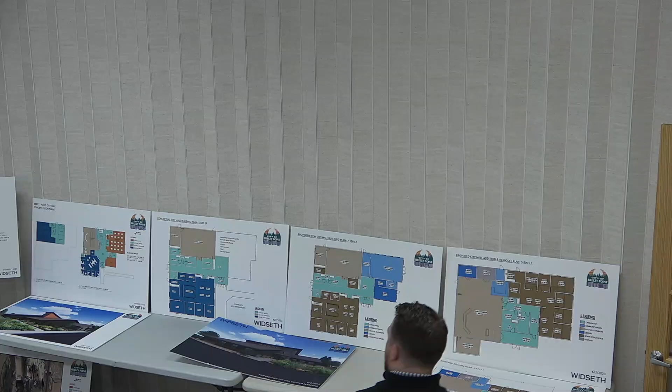So with that, I'm just going to move right on into how we got here. By the way, just so everyone is aware, we are recording tonight, so anyone who isn't able to attend will still be able to watch this presentation later. We'll get the video uploaded tomorrow.

As we talked about before, and I mentioned at our last open house on November 27th, this whole process started back in the summer of 2022 when it was identified that the city didn't have a facilities plan. Myself, Chief Sandell, Public Works Supervisor Zierden, and our building official Scott Sadusky went through a walkthrough of all the buildings to kind of feel out where we were at. We identified some issues with other buildings, more minor, like the public safety building, where we upped the budget for annual building maintenance. But the real concern came to City Hall, with some deferred maintenance issues in this building, as well as our spatial constraints.

So we brought it before the City Council last summer, and they said let's move forward with getting a facilities assessment completed. That was included in the summer of 2022 -- we're in 2024 now, so that was summer of 2022. Then included in the 2023 budget was to go down this facility assessment process.

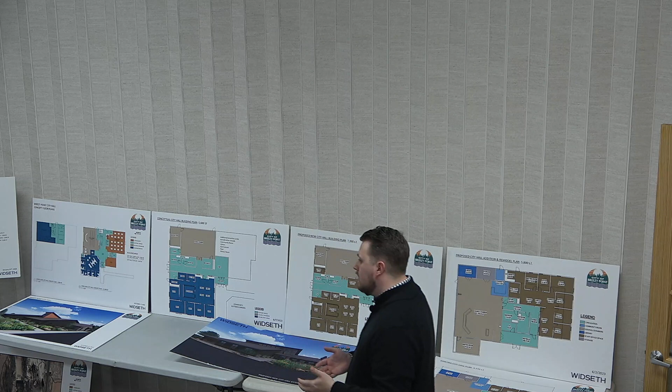We kicked that off in January. I believe Lindsay was here at the January 2023 council meeting to talk through what that process was going to look like. Then in May of 2023, on May 16th, we held a workshop, and Widseth presented their findings of the facility assessment. All that documentation is on the city's website under the city projects page, and also in my memo in the packet, at the very end, there are links to every document on that page.

So they identified roughly about $750,000 estimate of deficiencies to this building. But acknowledging that we have some spatial constraints and concerns long term, one of the pieces of that facility assessment was to look at what are some expansion options.

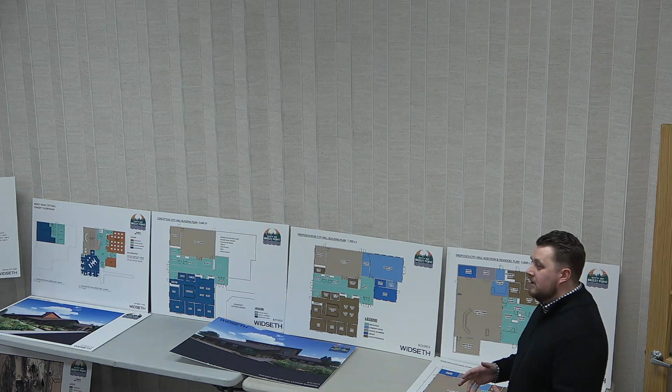This is actually not that new. During my perusing as we were going through this process, I found that in 2008 the city even issued an RFP to have this very discussion and have someone come in and do a facility assessment on the building. At that point the city council didn't move forward -- I'm not exactly sure why, but I think it had to do with the recession. So at that point they didn't move forward. But in 2008, it was already kind of identified that this building might not be adequate long term.

So there was a couple different options presented to the council in May. Obviously there was just the fix-what-needs-to-be-done option.

Option 2 was to fix what needs to be fixed, as well as expand the building, do about a 1,400 square foot expansion to the building and kind of reorganize the entire building. That would essentially require the building be vacated, brought down to the studs, and then completely remodeled.

Options 3 and 4 were iterations of a new building. That's on this board here. Essentially, the difference between 3 and 4 was this section here of the community room and library. Option 3 was just council chambers and staff space. Option 4 is council chambers, staff space, community room, and library.

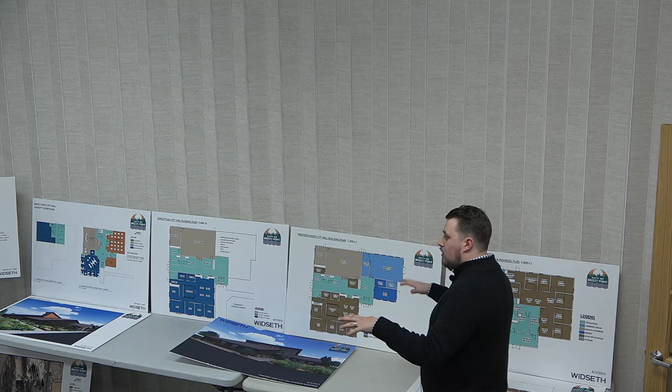Expand on what we do have, we serve here in this city hall, where both the council chambers offers as a council chambers and a community room. Dedicate those spaces, increase the library space. At the May 16 meeting, the council's consensus was option 2. Let's look further at options 2 and 4: the option of remodel and expansion, and the option of a new building with the community room and library.

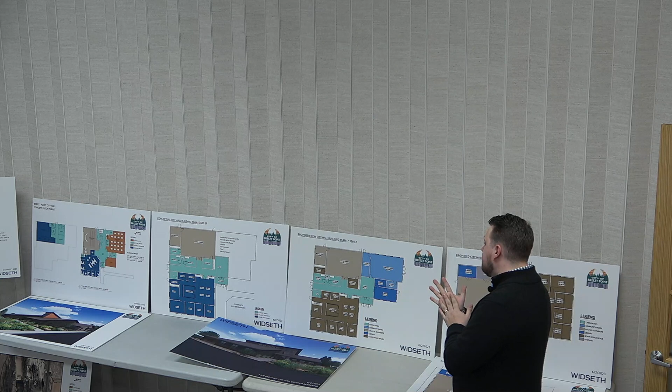So from there, that's when we created the city project page. Shortly thereafter, once the city's new website was launched in June, we held an open house where we had these 3 boards up, as well as this external rendering, and invited people to come in. Myself, Daniel, Assistant Administrator Ike, Mike and Lindsay were here. We talked through this with people that showed up, and we gave full tours of the building.

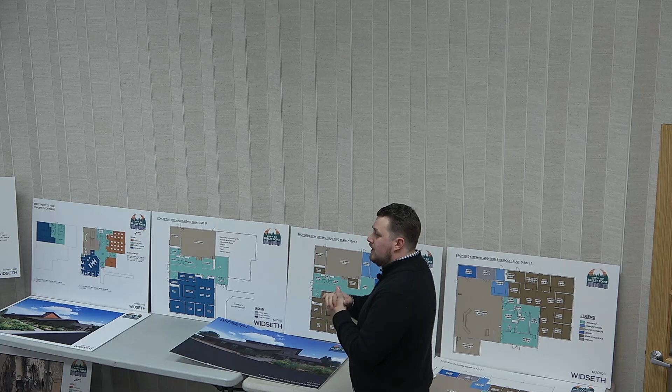Additionally, we brought in Baker Tilly to be one of the city's municipal advisors to give us some financial analysis. What could the city afford? How can different bond ratings work, and what could the city do financially when it came to paying for this potential building, remodel, or expansion? So then on August 1st, we came back and had a discussion of that.

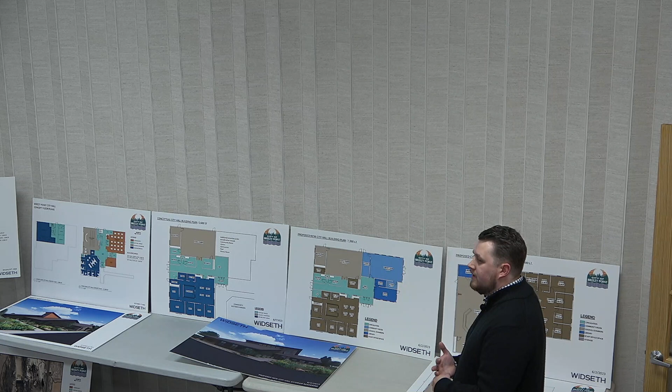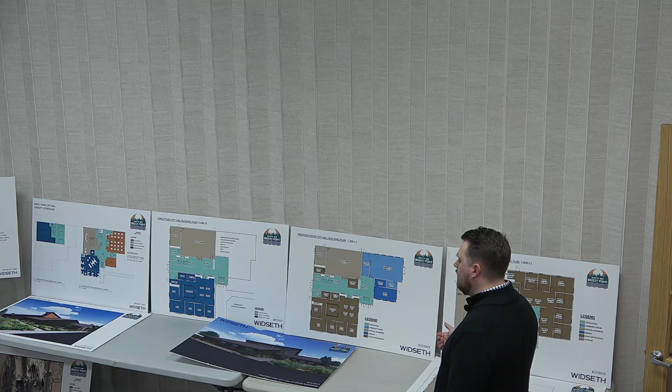Baker Tilly was here, ran you through those financials, ran you through potential bond runs, what those looked like. And then we had further discussion of, okay, here's what we've heard, here's what you've heard, what do you want to do? At that point, the council decided to move forward with furthering a design for a new building.

And then on August 7th, the council meeting approved a contract with Widseth initially to go into schematic design, take this design and go to the next step, with a couple caveats. It was essentially option 3/4, have the community room and the library as essentially add alternates, as well as what would a community center element comprised of a gymnasium, fitness room, pool, walking track look like.

So we went through that process. That did have some user groups involved to talk about what would you use in the library, what would you want to see in a community room, what would you want to see in a community center.

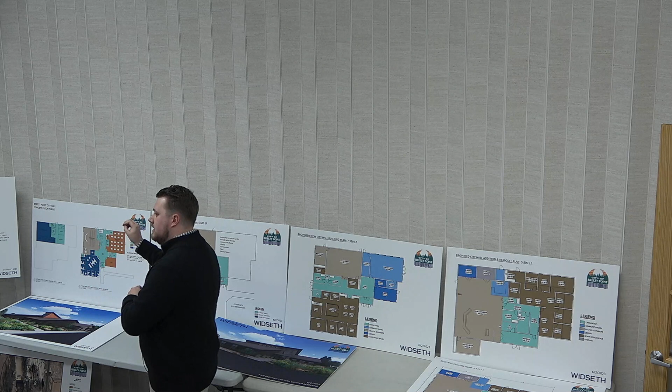So then on October 17th, we came back again in a workshop and presented this initial new design. Widseth kind of went back to the table and based on what we heard, redesigned the building a little bit to better fit the uses. There was a community center element that went to the east here.

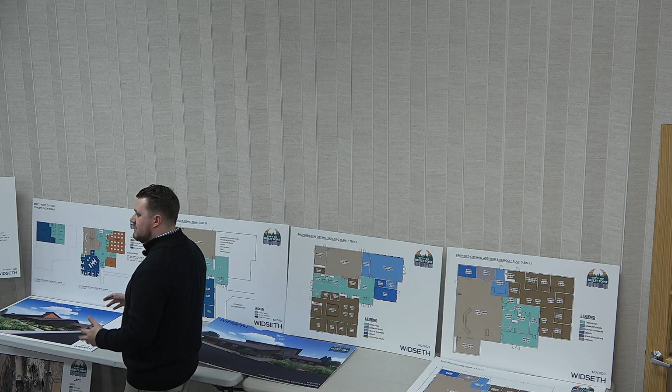So if all of these, the bottom of these boards is County Road 11, just for orientation. That went to the east. At that time, the city council discussed it, liked to see that there was a possibility of that in the future, but decided not to further pursue the community center element.

So that was on October 17th, and then at your November meeting, you went and signed a full design contract with Widseth to move into final and full design of a new city hall building comprised of the community room, library, council chambers, and staff space. So that's what we've been doing. That was approved in November.

Beginning of November, we have the design team that met pretty much weekly to work through every element, talk about what HVAC, mechanical, electrical look like, programming of spaces, making sure we got that all right. On November 27th, we had that second open house where we presented this initial first design. Had about 50 people there, a very, very good meeting. Presented this and fielded a lot of questions for about 75 minutes.

People had questions, concerns about the process, the building, financing, etc. We listened, we took a lot of notes and heard a lot of things from that meeting. Then on December 5th, we gave an update and heard some more feedback from the council about this initial design.

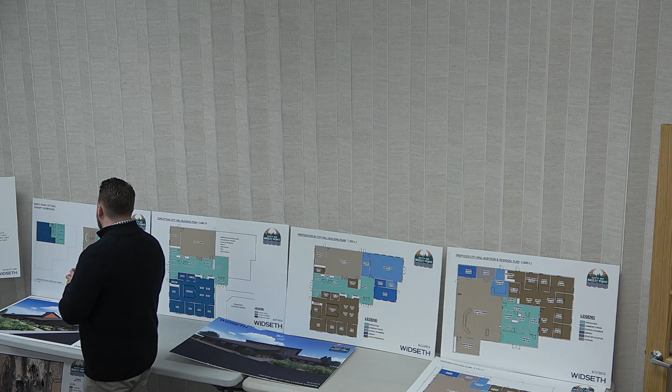This design was a building that was essentially a 2-level building of 11,500 square feet up top and a 4,000 square foot basement. The basement was intended for mechanical systems and was designed to be unfinished for future expansion, taking advantage of the topography on the land, potentially with a walkout. That space could be expanded in the future depending on how city growth goes.

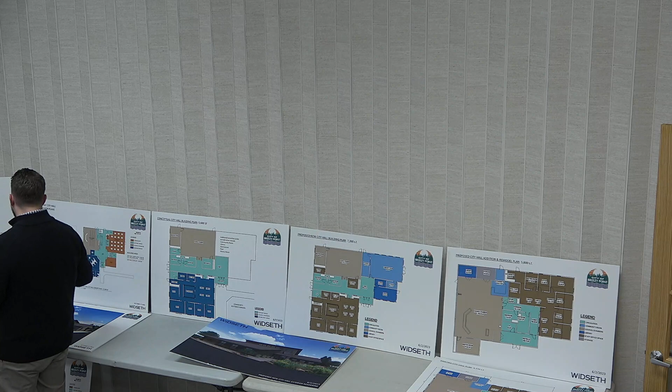So in December, moving into January, we continued to work on it. Shortly after Christmas, Widseth, as well as Andy Picard with High Tech, were able to put together an initial cost estimate for this building. At that time, construction was estimated to be about $4.5 million. That did not include the FF&E, and did not include design costs.

We as a design team said that's higher than we want to go. So we took a step back and asked, what are ways we can cut back? What are the essential functions of this building, and what are things that are additional? That brings us to essentially the design we have that was in the packet and that we have here tonight to talk about, which Lindsay and Mike are going to go through in detail.

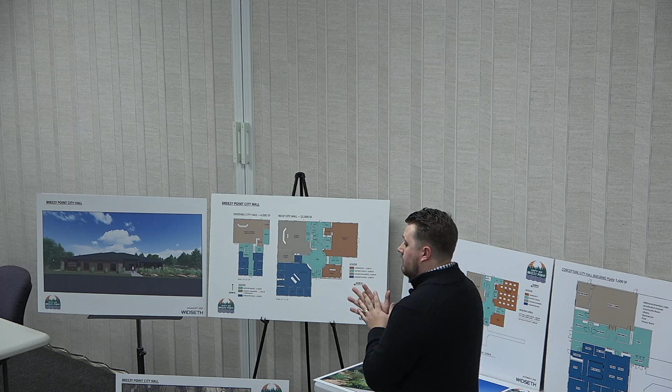But I just want to go over the high-level items that are different. One of the first things is that this is now a 1-story building, so we got rid of the basement. The basement was estimated to be about $750,000. As much of a luxury as that is, it's really a luxury and not necessarily something needed today. Honestly, looking into the future, even 10 or maybe 20 years out, we didn't have an identified time when we might need to finish that basement, because this building is designed, even in its current 1-story configuration, for growth. We'll talk a little bit about that as Mike and Lindsay go through it.

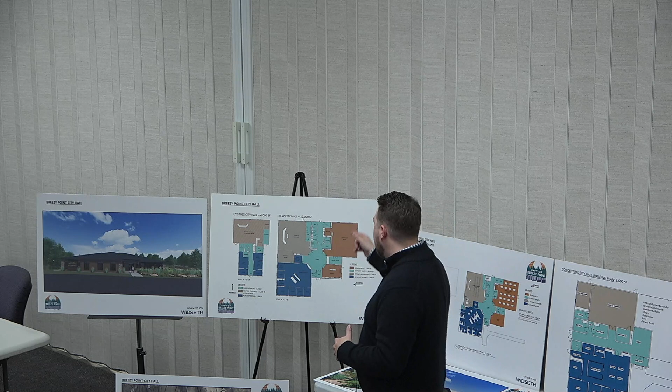So with removing that basement, we saved some cost, which involved rearranging some mechanical and electrical systems. But by doing so, we were able to get rid of a staircase and an elevator shaft as well. Both had a cost, and it also provided space to relocate those mechanical and electrical systems.

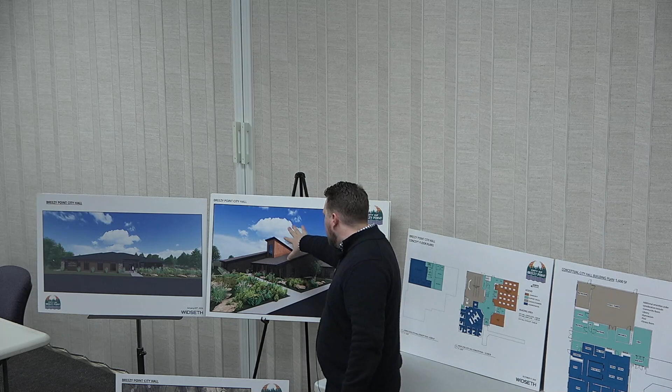The other thing you'll see, if you go between what was presented in November of '23 and what we're presenting today, is that the exterior has changed. We received some comments that the exterior maybe seemed a little extravagant, so we toned it down. We looked at the finishes, took the roof down, got rid of the big glass cap up top, and toned it down overall. It's less in-your-face, a more toned-down building.

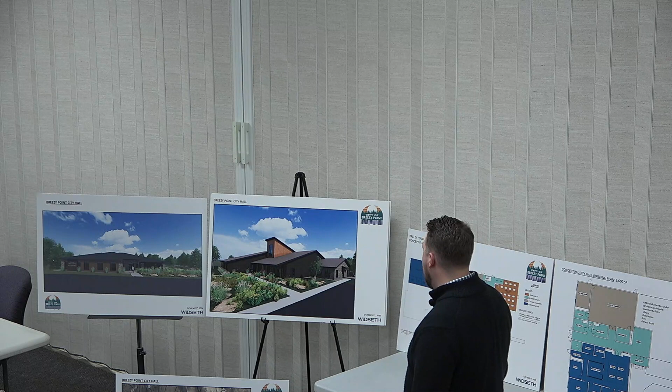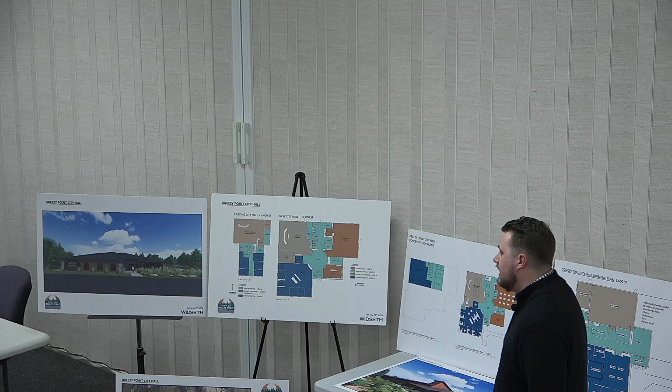We looked at the external finishes and toned those down as well, but maintained the internal floor plan. So that's how we got here. Tonight we're here to go through the details. I'm going to invite Mike and Lindsay up now, and we're going to go through each element of the proposed building in detail.

Thank you, Administrator Chansky. My name is Lindsay Krenz. I'm here tonight with Widseth to walk through the revised floor plans for the proposed new City Hall building. This image shows side by side the existing City Hall and the new City Hall together, at the same scale on the page, with square footages shown. The departments are highlighted similarly, so you can visually see where each of the departments and support spaces fall on this drawing.

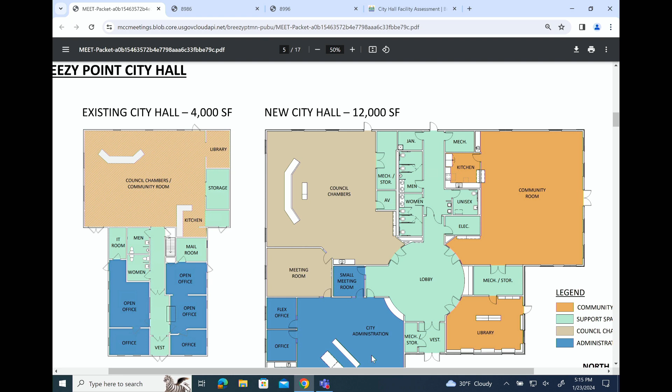The one thing to note is that the room we're actually in right now is a multi-purpose space, shown in overlapping tan and orange color because it acts as both the council chambers and the community room space, so there's a lot of shuffling that happens in this space. The plan for the new City Hall is to have a dedicated council chambers and a dedicated community room with separate access, allowing the council chambers to stay set up formally without that constant interchanging of groups of people, furniture, and AV equipment.

So the highlights—I think David did a really good job of explaining the differences between these buildings.

The changes that we've also developed: again, the one level facility, we still enter in basically the same direction from the west, entering into the centralized lobby space. We have the 4 quadrants of the building. Not much has changed there. City administration in the lower left-hand corner. This space didn't really change much.

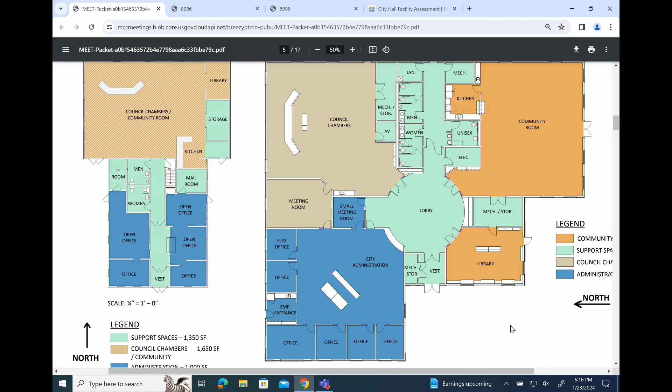We did reconfigure the entry door system. If you want to go to the site plan. Just because of the change in grade, we're no longer having that lower level and the walkout capabilities, so we thought adjusting the employee entrance into that administrative area made some sense, a smaller sidewalk, so they've got

a dedicated entrance and exit to that space. Also, the main public walk area, we felt it was really important to maintain the design of a snow melt system through the entry sidewalk. So the light gray areas, as you can see kind of central on the plan, those would be for a snow melt system. It's a really nice maintenance item, so we prevent a lot of slipping and falling, and a lot of snow and salt materials coming into the building as well.

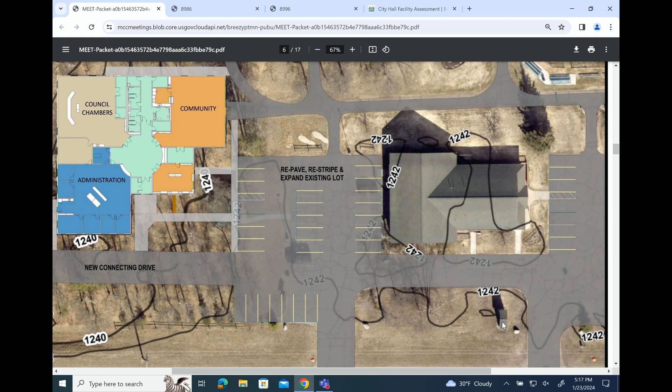So some other changes on the site: the existing monument sign that's right outside of the existing city hall, we deemed that to be really in great condition and no need to move it just slightly north on the site. So that would remain in its existing location.

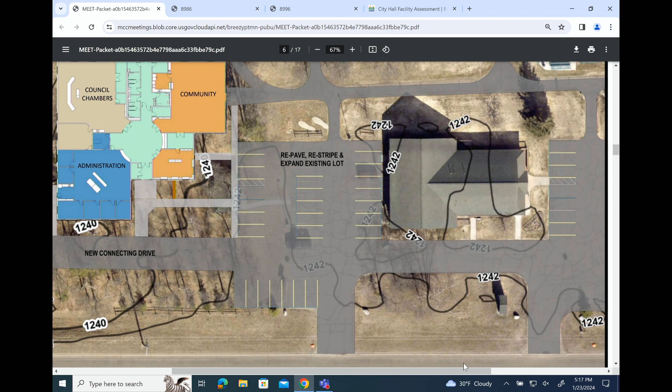We are planning to repave and restripe and expand the existing parking lot that's just north of this building to accommodate additional parking spaces, and then the new connecting drive to the public health or the public service building to the north here. We did, however, take out the patio.

So outside of the library, we had proposed a patio space, which would be accessible either from the exterior or the interior of the building. The benefit of that is it's a really easy thing to come back and add at a future time, so if there's a desire to have that amenity, it can be added in. We have an exterior door out of the library, so it's still really accessible.

As we look at the community room, this space is still providing access from the exterior. So when we think about large groups, catering events, community events, voting, that area is going to be really accessible from both the interior of the building and the exterior with a dedicated entrance.

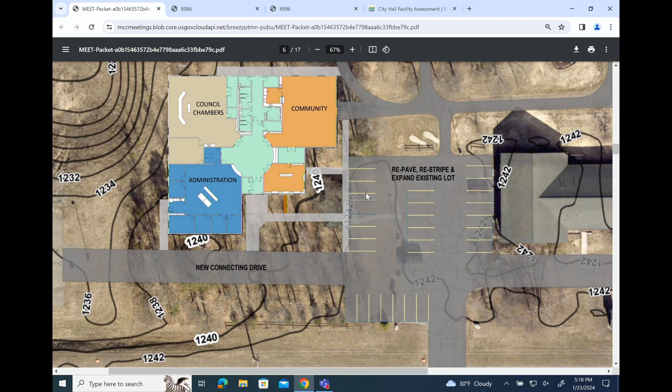And then to the east of the plan, we've got an egress route, so from the council chambers, the circulation area, we've got a really nice egress route as well as exiting the building, we added a feature. At the last open house, we heard about making this facility a lot more accommodating to public members that might be using the park or the trail system.

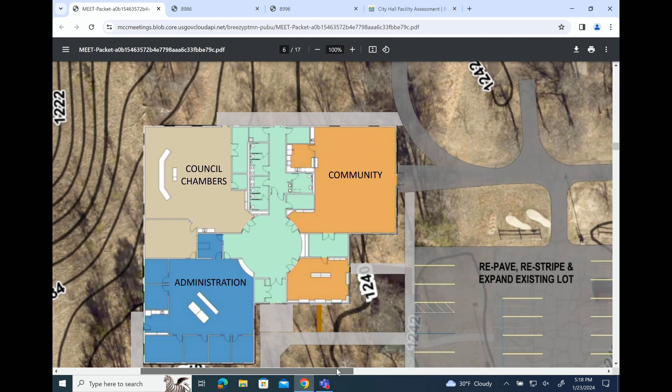So from that egress sidewalk on the east side of the building, we can actually enter in that door and have access to the men's and women's public restrooms as well as the drinking fountains. David's hovering over a set of secure doors that we included in that hallway. During normal business hours, those doors could be propped open, and then in the evenings, those could be closed and locked, so people could have access through that east-facing door to those amenities, which I think is a really nice feature.

During our user group meetings, we met with Joe Zierden, and he mentioned how he would prefer to have an accessible restroom for people to use at the park all hours or all seasons. So I think that was a really nice development based on the feedback we received.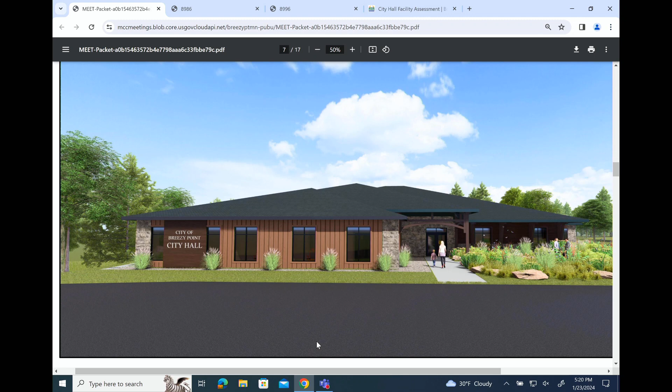We took a look at several different types of roof structures, also different roof materials, so shingle roofs versus metal roofs. Everything has a budget and a maintenance impact, so it's about this balancing act and finding where the best balance is going to be. So this is where the exterior ended up today.

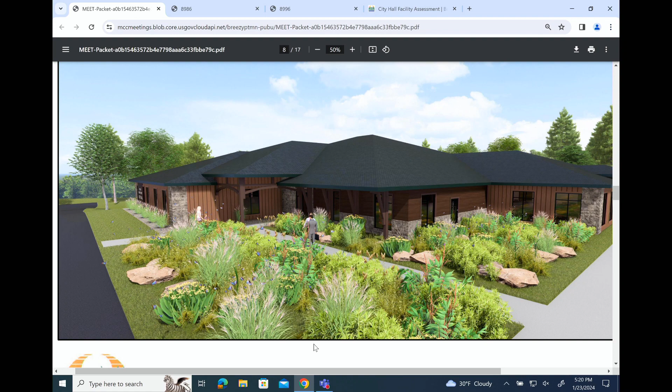Still different materials, really bringing in that northern Minnesota feel. That was one thing we also heard at the last open house, was really wanting to make this feel like we're in northern Minnesota intentionally.

Another really great feature is we've talked with the gardening club, and they love the opportunity to bring the beautiful botanical gardens from the cemetery over to City Hall. Through landscaping efforts, we'll be able to bring and incorporate those garden elements at City Hall too, and I think they've even offered to help maintain and manage that planting area. So really a beautiful entry into the new building.

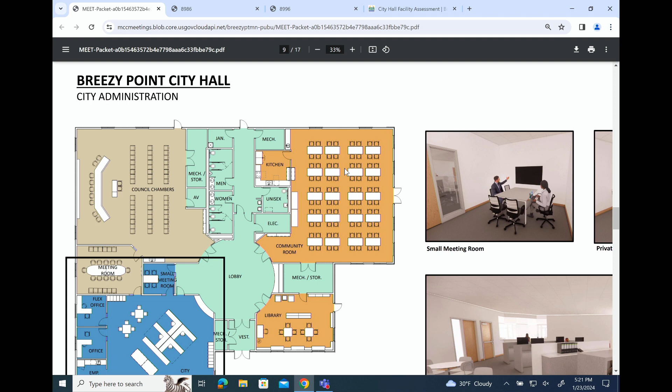So the next few slides here highlight different areas throughout the building, and they're paired with interior renderings. The interior renderings show furniture and people as a sense of scale. This is still really flexible. We haven't really figured out a furniture package, but I think it just helps illustrate the use of those spaces. Material-wise, we keep things very neutral at this point. We haven't selected specific materials, but it helps illustrate the use and scale of a space.

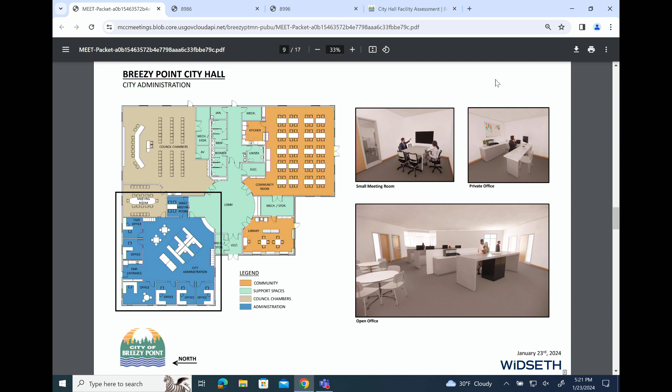So the first area we're highlighting here is the city administrative offices. We have the large rendering in the lower right-hand corner. This is the open office area. One comment we did hear is that the configuration of the cubicle furniture looked a little limiting in this configuration.

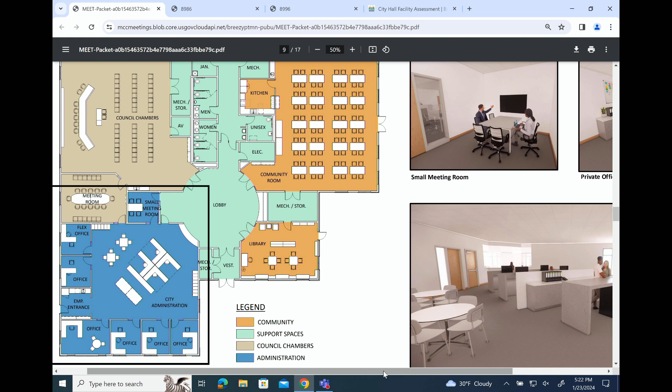In today's environment, we only have the need for 4 cubicles. But we did take a look, and we'll see as we slide through some additional images, how that space could be reconfigured to accommodate future growth without ever changing that space architecturally, which I think is really interesting to look at, how the furniture can support that. With the removal of the basement, we also talked about the benefit of bringing the power and data to those cubicle stations overhead, which will really promote future flexibility as well.

So you can see in this rendering we're also showing filing cabinets and storage. Without the basement, we would need to accommodate storage on the main level, so we're showing a really good quantity of filing cabinets and storage capacity there. We still have the dedicated employee entrance with a little kitchenette space, so the administrative staff can just stay within their office. We're showing collaborative tables and/or lunch tables in here, and also included the flex office, so that is an opportunity for growth.

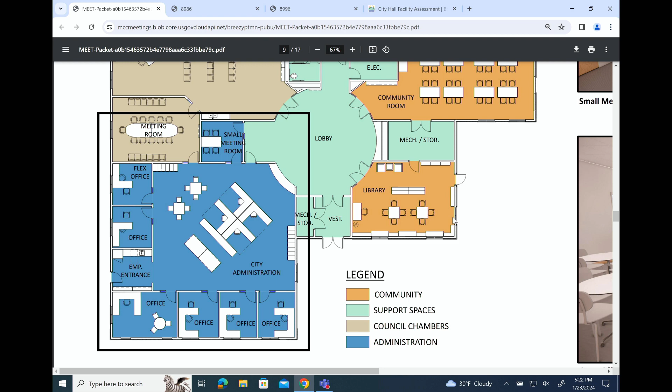As we look at the renderings on the right-hand side of the page, a little bit more detail. So again, this is the rendering of the large open office space, the private office, and then we have a small meeting room. So this is a really unique attribute this plan has for safety and security.

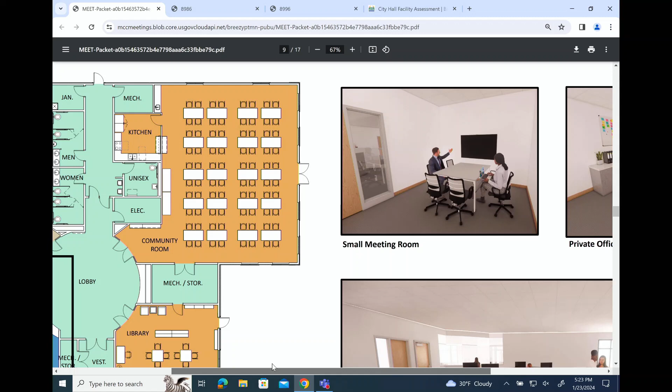Instead of inviting public members into your private office, where those conversations might get heated or contentious, we now have a small meeting room that the public can enter and the city staff can enter from a different room. Through door security hardware, the administrative staff could pass back into the administrative office and the public has free access to the lobby. So a really nice common small meeting space for some of those conversations that would previously have happened in the hallway or in someone's private office, for example.

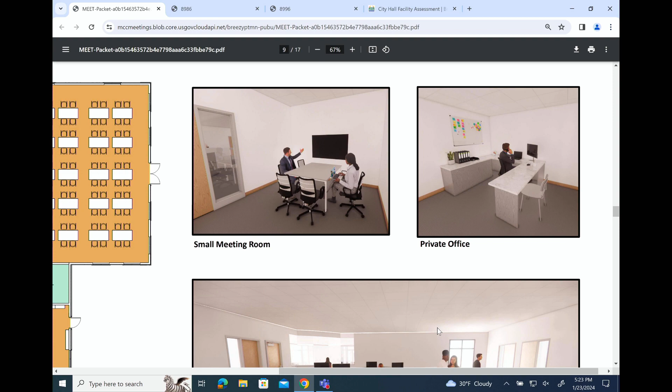All right, so rolling into the next slide, we'll take a look at the council chambers, but I just want to remind you to look at the overall floor plan. If we look back at the city administrative offices, we've shown a wider range of furniture arrangements here to accommodate, again, that future growth and flexibility within the space without having to change any walls or ceilings.

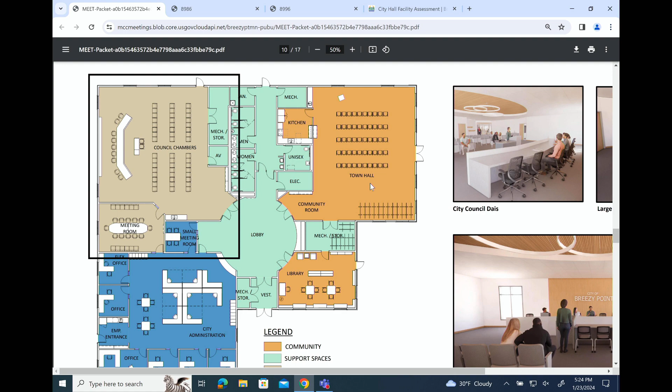Council chambers, as well as the community room. The community room, as you see, is in a town hall setup in this slide, and will continue to change from image to image. The previous image was more of just a traditional community room with tables and chairs. This was something we heard through the user group intake sessions, that the room was a little bit smaller in scale than we probably needed, so they wanted a room to comfortably plan for 75 to 100 people. That has been accommodated with this plan as well.

The council chambers room has dedicated seating, not attached to the floor, but probably will remain in the configuration that it is. We have the dais at the front of the room with a podium similar to what I'm at right now, so a standing height podium opportunity, but then also a sitting table. Sometimes those presentations like to have options for multiple configurations.

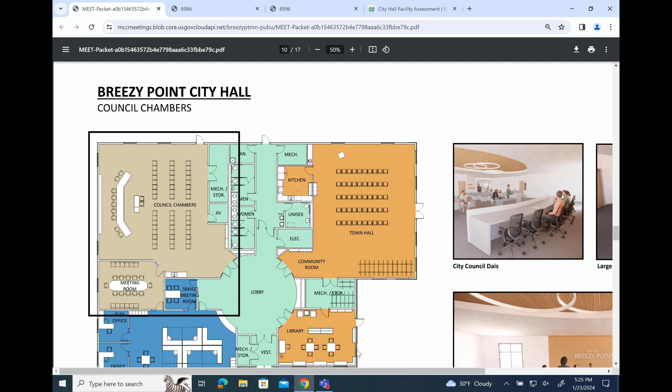Adjacent to the council chambers, we have a large meeting room to accommodate up to 12 at the meeting table, plus an additional 12 people in that meeting room as well. So if there's a need for breakout sessions or just a smaller, medium-sized meeting space, that room has been illustrated there. These spaces would be heavy on an AV package, but there's been a lot of conversation that the AV package currently in this room would accommodate the needs of that space very well. Hoping to reuse a lot of the existing equipment, the TV screens, those types of things in that space.

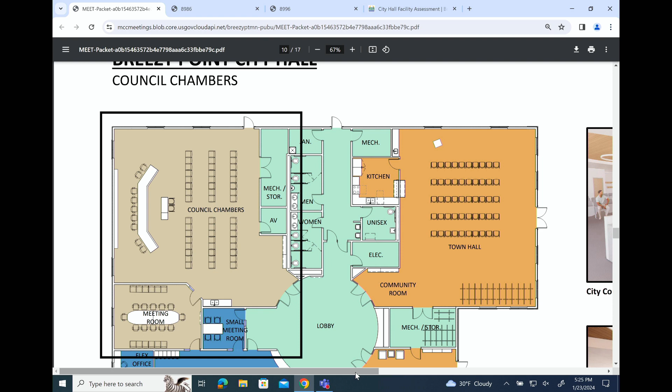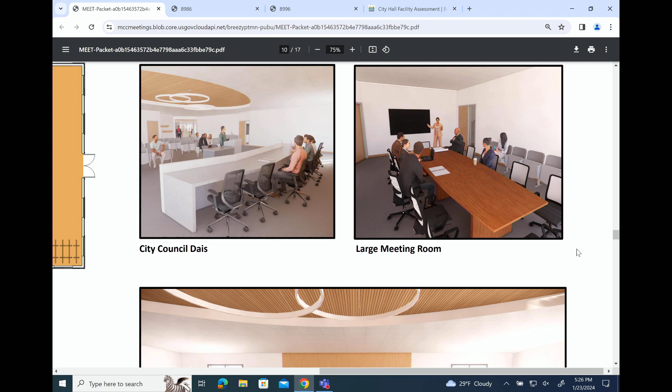If we pan over to the renderings, this room is shown from a few different angles. We have a view from the council dais desk looking out into the audience space, a view of the large meeting room and the technology provided there, and a view from the audience looking at the dais with the presentation table, some nice signage on the wall, and acoustic ceiling treatments. The acoustic needs of these spaces with an AV package is a little bit higher than your traditional room, so that's accounted for as well.

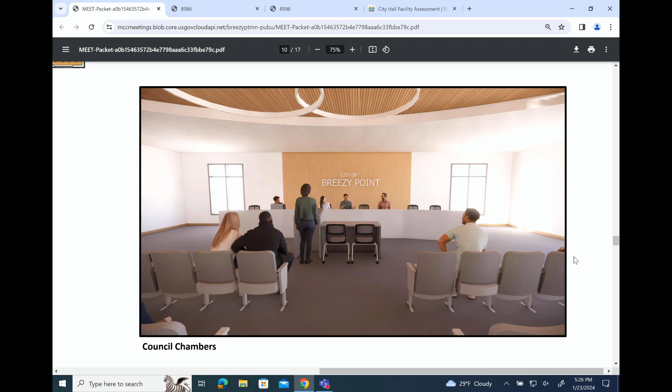Rolling into the next slide, we take a look at the community room. This is kind of a split concept - I think of this as being more of a training room. We have the traditional tables and chairs at the back of the room, with more of the town hall facing east, lines of chairs on the other half of the room. This room would be accompanied with an AV screen and a technology cabinet, so presenters could have access to that technology if needed, but not necessarily available for everyone to use at all times.

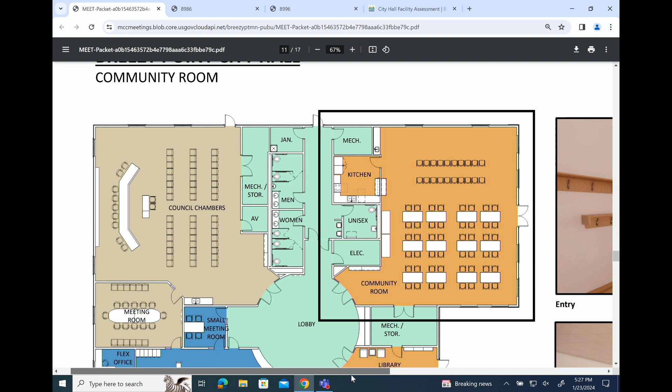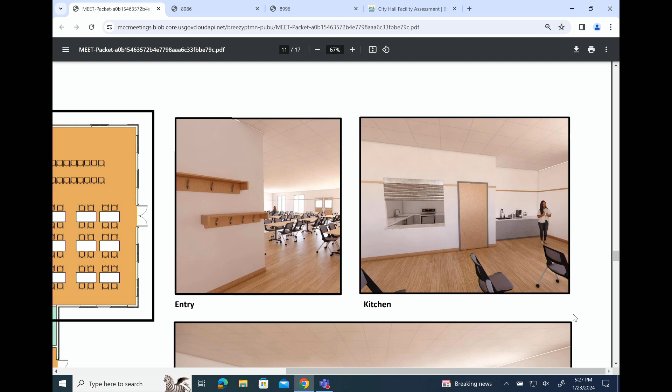A kitchen is also provided in this space, similar to the other room, for serving food during events. But the benefit of this room is we can actually close it down with the door, so if you're renting the community room, you wouldn't necessarily need the kitchen component. We've got that ability for event management control. We've also added a serving window in that kitchen, so passive food flow in and out of that space is a lot more accommodated with a large-scale window opening. Along this wall, adjacent to the serving window, is where we'd plan for banquet tables for serving, with additional power needs and furniture pieces to accommodate banquet or buffet style serving.

The image at the bottom of the screen shows the split perspective of the room again - tables and chairs on one half, and the lecture half of the room, to show the flexibility there. This room in particular, I think a furniture package is going to be a really great asset - tables that can flip vertically, roll, and nest into a very small area on the floor, as well as chairs where the seat can flip up and they can nest together to the side of the room. Very easily this room can be transitioned from event to event with very little physical strength or skill. These rooms are really community focused, so having a wide array of users able to reconfigure the room in short order is key with the furniture package.

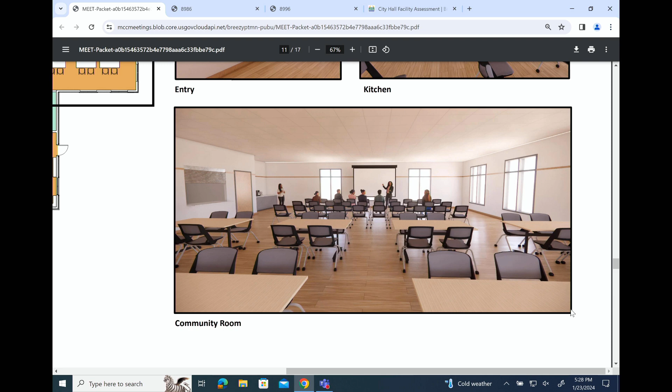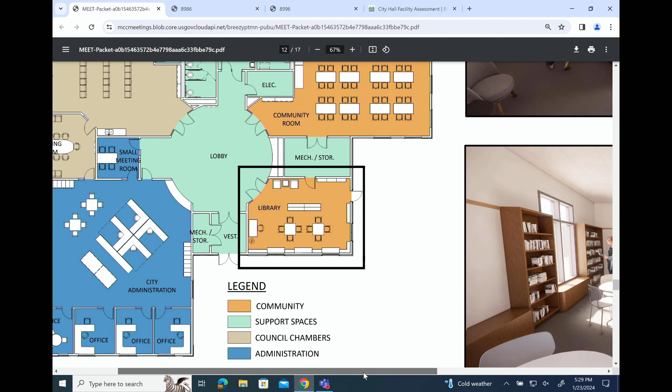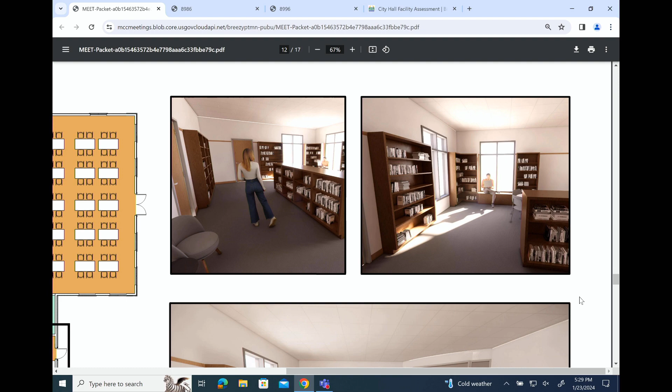The next slide is the library. This space is a little more straightforward - entrance doors, we don't necessarily have a circulation desk, but lots of room for resources and storage throughout the space. We've also shown some collaborative tables, a computer desk, and some soft seating. Just a really straightforward, flexible space. We've talked a lot about providing adequate power and data for future needs - say a library in 10 years isn't necessarily what the community wants to support, this could easily convert to an open office or a large-scale meeting room. A really good multi-purpose space. The layout on the left shows what that library could look like with the large meeting room table configured in that room, for future flexibility purposes.

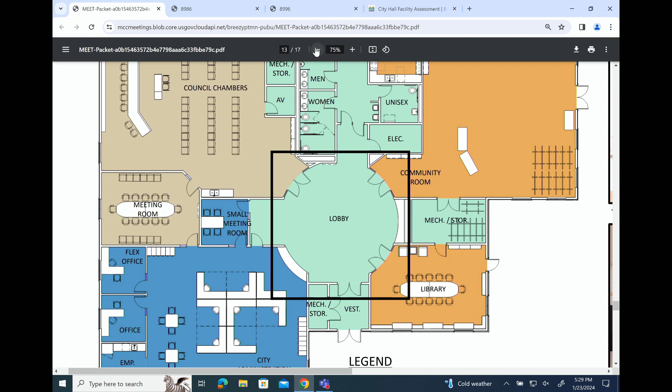The community room also, we set it up for voting. Voting is something we think of as just a few days of the year, but it's actually a really big event for municipalities. We've talked a lot about the flow of traffic into the building through the main lobby, into the community room at the check-in tables. We have our voting booths, the checkout table, the ballot tabulators, and then being able to exit out those dedicated community room doors - a really nice flow of people in and out of the building. David was talking about the numbers of people that come here to vote, and it's almost in the 2000s, so a really nice setup for those particular events.

This last slide here highlights the lobby.

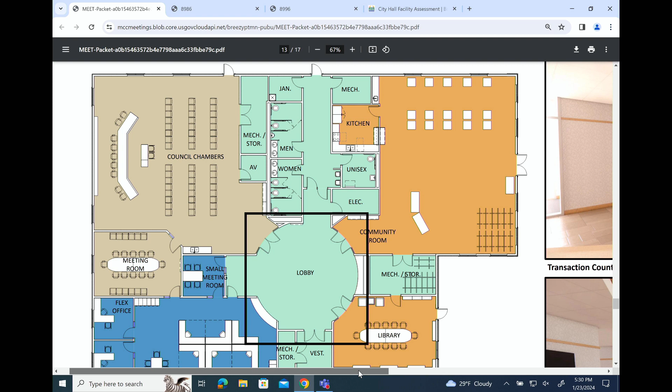So this one, I think in particular, is really nice to see a sense of scale. It looks a little bit large on the floor plan, but when you start to see the space and how it relates in 3D, I think it lays out really nice.

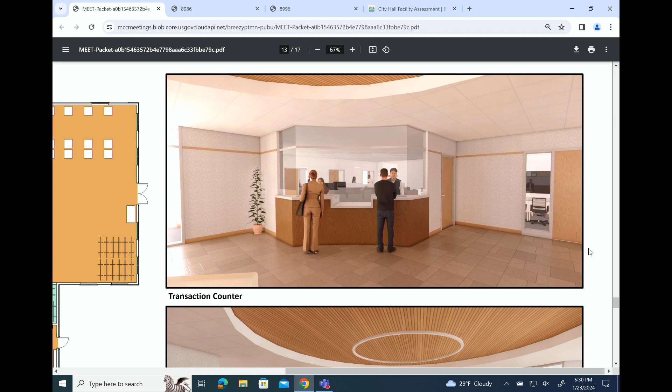The transaction counter to the city administrative offices allows for up to 2 terminals, plus ADA access in between. So anyone who is chair-bound would have a really nice access point to that transaction counter.

This area is going to get a lot of wear and tear, so a harder floor is really nice for long-term durability. And we did plan for some additional acoustic treatments in the ceiling to absorb some of the click-clacky noises in those lobby spaces.

With the removal of that high tower piece, we lost that west-facing window that was pouring in a lot of natural daylight to this space. So the term I like to use is borrowed daylight. With the utilization of glass into both the library and the community room, we're shining that natural daylight into this lobby space. So although it's not exterior light, we're still getting some natural illumination and the connection to the exterior.

Also, this space I think would be really nice outfitted with a digital screen, so whatever is being presented in the council chambers or the community room could also be presented out here. If there were people waiting for a certain part of a presentation, that space is really accommodating for that as well.

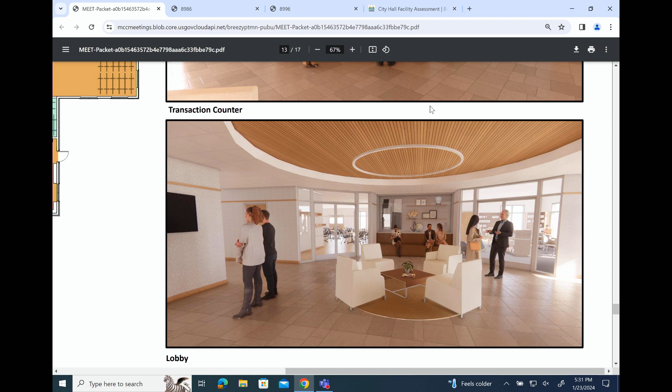I think that's the last slide. Awesome. So that is the floor plan, the design.

Also, Andy Picard could not be here tonight with us, but High Tech did provide, as they promised, what they're calling a kind of 70% cost estimate. One of the things that was part of this stage is what's called the design development package.

That was provided to the council about 2 weeks ago. It's on the city website, was linked in my memo in the packet, so people could go look at that. And that was provided to High Tech.

They were able to go out, take that — again, it's not full construction designs, but it shows where things are located, the loads for the HVAC, the mechanical, the electrical and things like that, so they can understand what's going to be in this building, dimensions of the building, etc.

And then they could go to subcontractors, figure out what they're looking at cost-wise, and also apply — remember, High Tech is using Gordian — so taking what the subcontractors gave them and applying estimates from Gordian as well on what each material is.